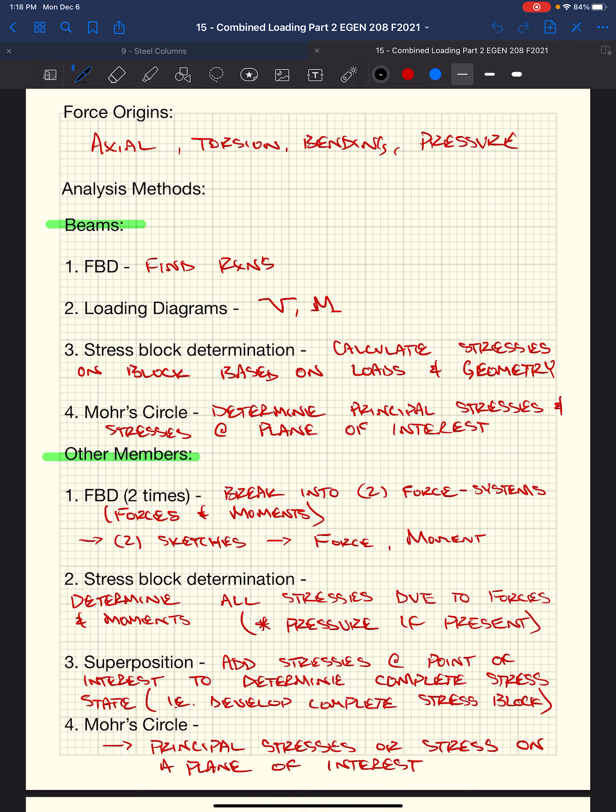Then we can calculate stresses on a stress block, based on those loads and the geometry of our beam. And then we can finally go to Mohr's circle, because we are always looking for the worst case stresses at a given location.

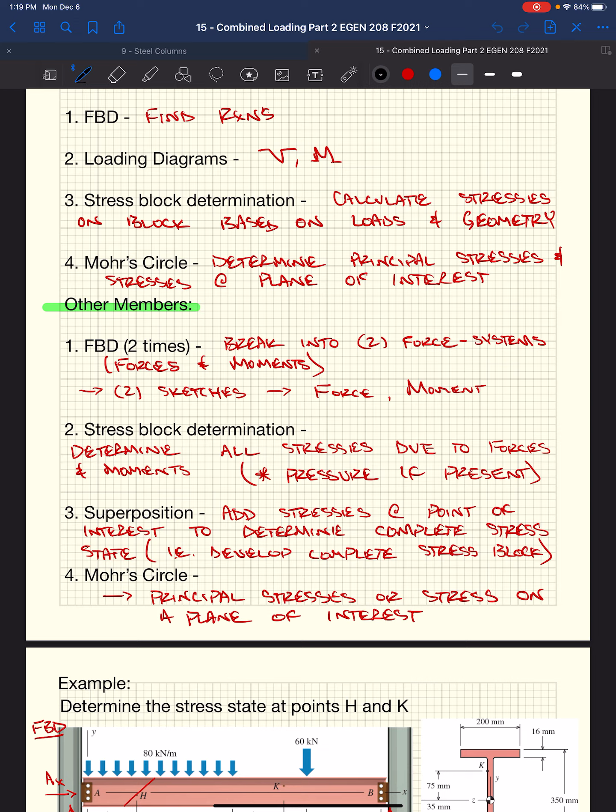And so we need to utilize Mohr's circle at times to make sure that we capture our principal stresses, which is our stresses in which we would have zero shear stress, our extremes. And then we can use that Mohr's circle to also figure out our extreme shear stresses, our max shear stresses. So that's our beams approach.

For other members, things can get fairly complicated fairly quickly. We can have bending in two directions, we can have axial load, we can have torque.

So when we have those things, when we approach other members, which we're going to start an example today, we're going to look at a free body diagram, but we're going to do that free body diagram twice. And what does that mean? We're going to break our force systems into two separate ones that incorporate our forces and our moments.

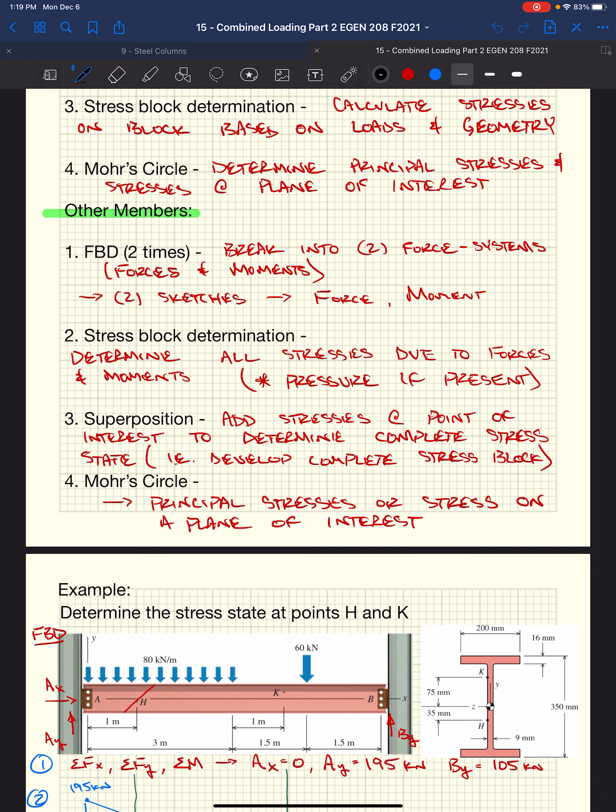We're going to have a shear force, we're going to have an axial force. And sometimes, based on the configuration, those shear forces and axial forces, say over here, in some bending problem or some mechanism, is going to create a bending moment or torque or something else happening where we're actually looking for in our mechanism. And so separating them can make things a bit simpler and isolate the forces and the moments.

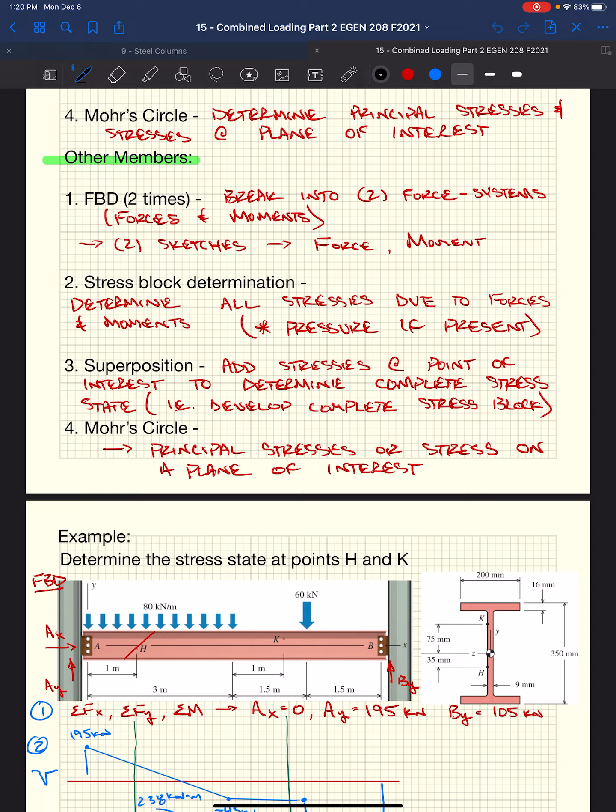So then after we do that, we can then figure out a stress block for each of those two force systems, determine all stresses due to forces and moments, pressure if it's present. And then once we have these two essentially stress blocks, we can add everything together using superposition, because we know those forces and moments are acting together. We just separate them to make things a little bit simpler.

And then again, once we have that final superimposed stress block, we can figure out Mohr's circle for that stress block and then figure out our maximum stresses, our normal stresses, which are our principal stresses, and our shear stresses, which are the top and bottom of our circle.

So when we started our example, we started our beam example on Friday, and they asked us to determine the stress states at point H and K. And as I mentioned on Friday, us as engineers, you as engineers, would be the ones deciding where we want to look at this beam, what points H and K are and where they are on our beam.

In this instance, they gave it to us. I will give it to you in the exam - that's not, I'm just saying in the future, as you do this more and more, you will find that you are the one that's going to decide where you look at this member. In this case, they gave us H and K.

As we know from our approach, we need to figure out our reactions and our shear and moment diagrams, so we did that. Now that we know our shear and moment diagrams, more importantly, we know our shear and moment as it relates to our 2 points of interest, H and K, because we know our demands at H and K.

We could draw a free body diagram, which helps us discern what we have and what we don't have for our positions at H and K. In this case, we have our design demands, moments and shears.

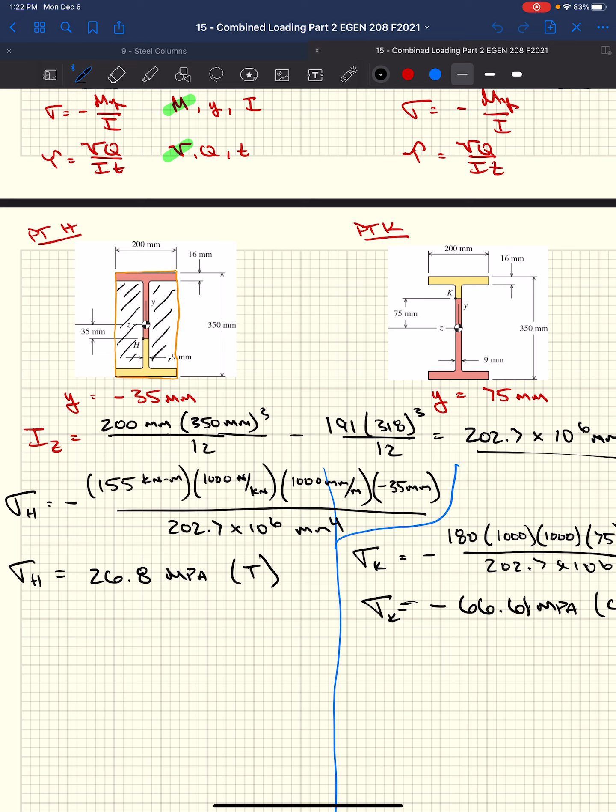We also know for negative My over I, we need the moment of inertia. So I decided, as I explained on Friday, I just did the overall rectangle minus two smaller rectangles. And you could go through the parallel axis theorem instead. Totally valid.

So I figured out the moment of inertia, and based on knowing the moment, the distance to our point from the neutral axis or centroid, and our moment of inertia, we could figure out our stresses. Our stress at H is 26.8 megapascals positive, so it's in tension. And our stress at point K is 66.61 megapascals in compression, because it's negative.

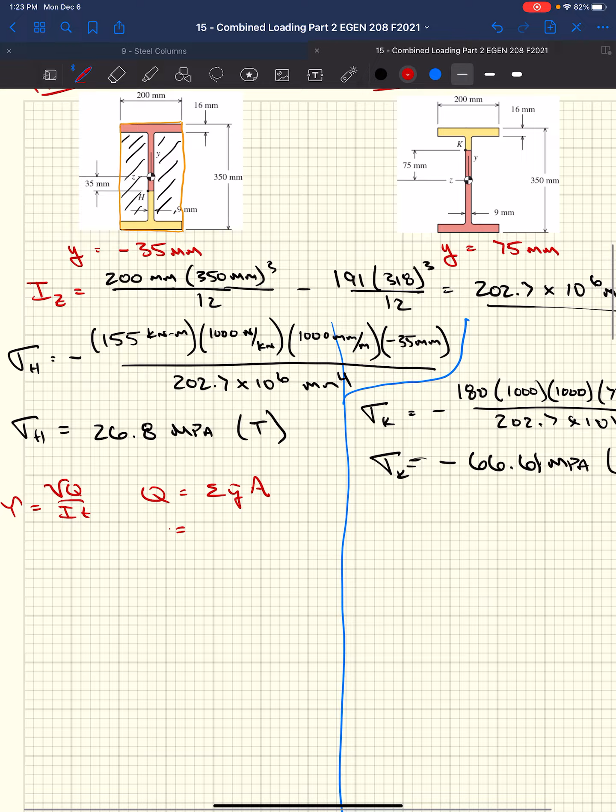Now we need to figure out our shear stress, tau, VQ over It. We know Q, the first moment of our area, or the integral of y dA, is essentially the summation of all of the parts of our shape above or away from our point of interest, of y bar A, the centroid of our piece times the area.

In our case, if we were looking at H, y bar A would be a summation. I'd probably look at three rectangles: what is the y bar or distance to the centroid of this rectangle times its area, plus the distance to the centroid of this rectangle times its area, plus this one as well. So if you do that, and you can do this any way you want.

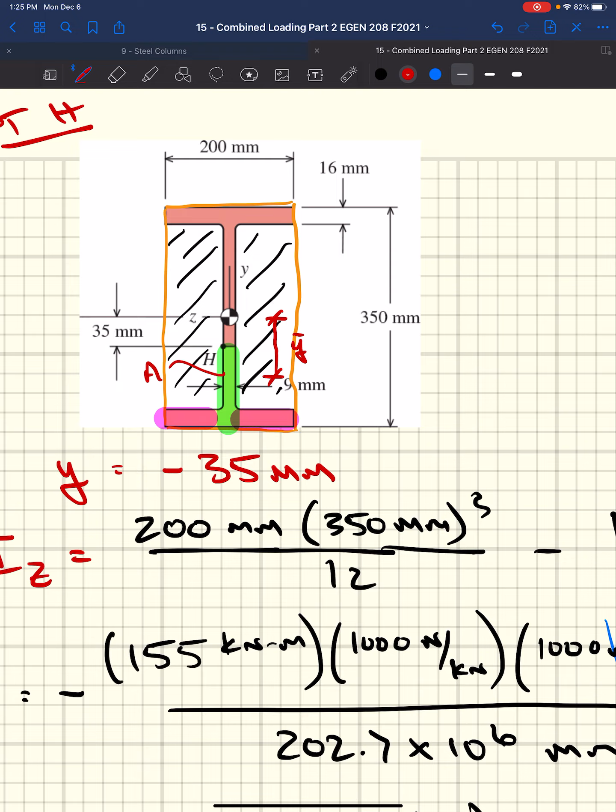You could separate this into many different rectangles. You could look at just the flange and then cut this off above the flange and just look at the web. You could cut the web into two rectangles and do it twice. It doesn't matter, you're always going to come up with the same answer, but we're looking for the distance to the centroid, or y bar.

All the way up to the centroid, y bar, times area. We do that for each of our rectangles, for the area that's beyond our point of interest. We cut it horizontally at our point of interest at H, as we did when we learned about shear stresses.

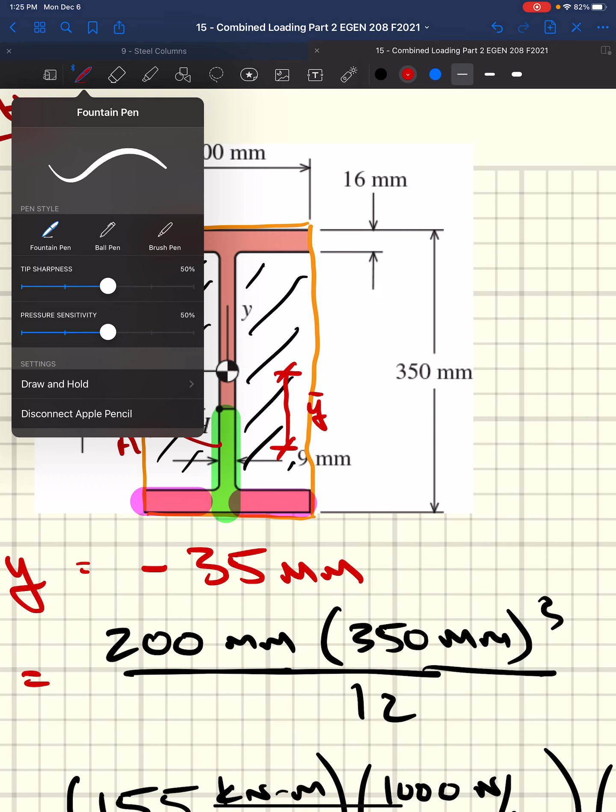So if we do that, I'm not going to bore you with all of the details. We get 642,652 millimeters cubed. Y is in millimeters, A is in millimeters squared, so we get millimeters cubed.

Based on that, we've got all the other parameters. V we know from our shear diagram. Q we just calculated. I we calculated to figure out our bending stress. And then T is the width of the cross section when we cut that horizontal plane.

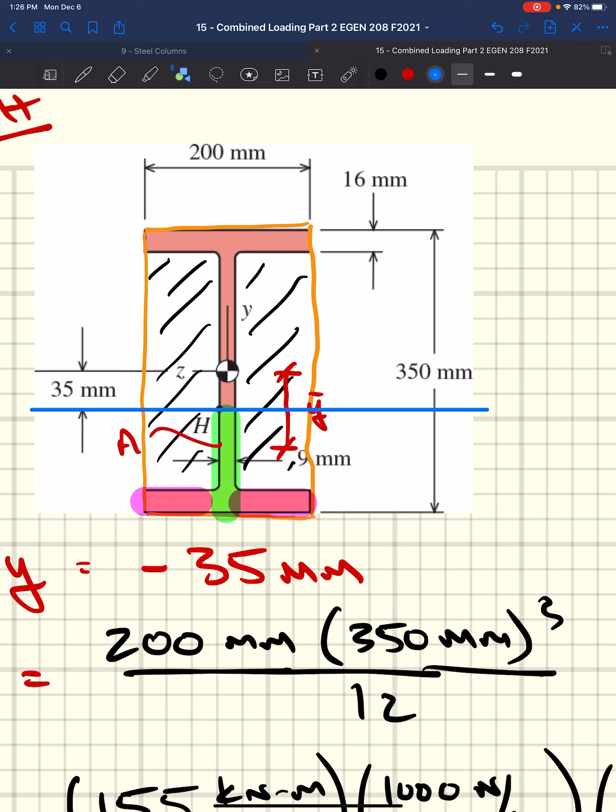So if we can imagine at H, we are going to essentially cut this member right at H. And we want to know how much of this member is along this cut plane—how long is this? Well, so that would be our thickness T. So T is 9 millimeters.

In the homeworks, I think you had two webs, so if we had another web coming down here or another web coming down here, it'd be 2 times 9 millimeters, because we're cutting 2 sections. In this case, we only have one, so our thickness is 9 millimeters.

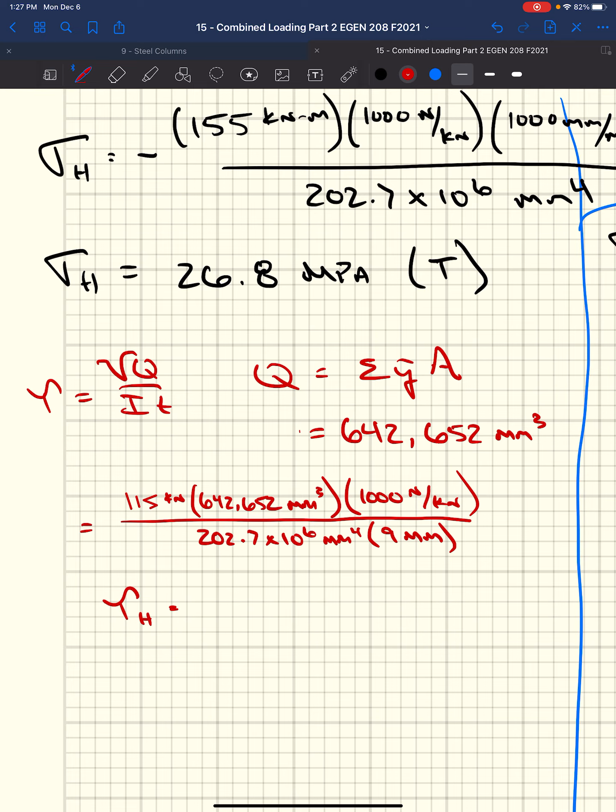Based on our shear diagram, the shear at point H we determined was 115 kilonewtons. We have 642,652 millimeters cubed, and I'm going to convert to newtons, because we know a megapascal is a newton per millimeter squared, divided by I, 202.7 times 10 to the 6th millimeters to the 4th. And as I said, our thickness, or the width of our cross section that gets cut by that horizontal plane, is 9 millimeters. So I put that in there, and we get tau at point H equal to 40.5 megapascals.

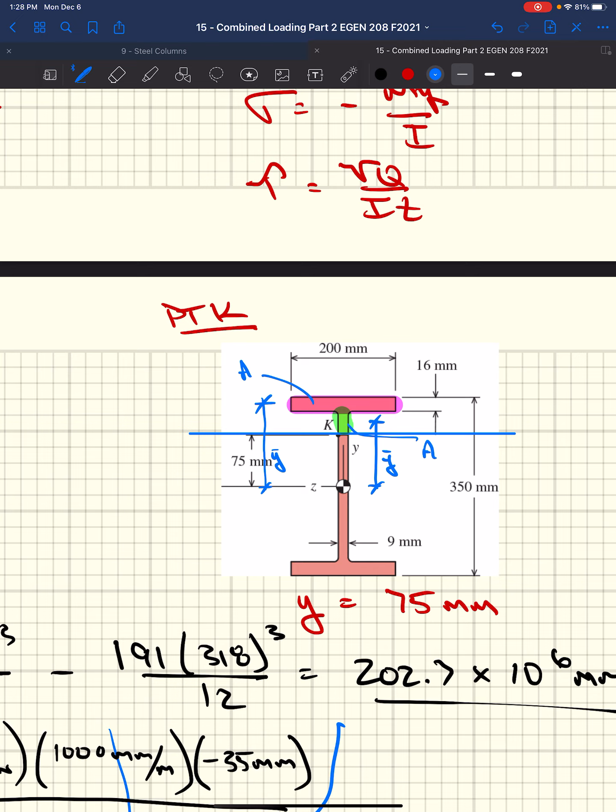Same exercise at point K. VQ over IT, Q now equals 622,852 millimeters to the third. What does that mean? Again, we cut our cross section at our point of interest and try to figure out the first moment of the area beyond our horizontal cut at that point. We could break this into one rectangle here and one there, take the Y bar and area for each, sum them up, and that gives us Q, which is 622,852 millimeters to the third.

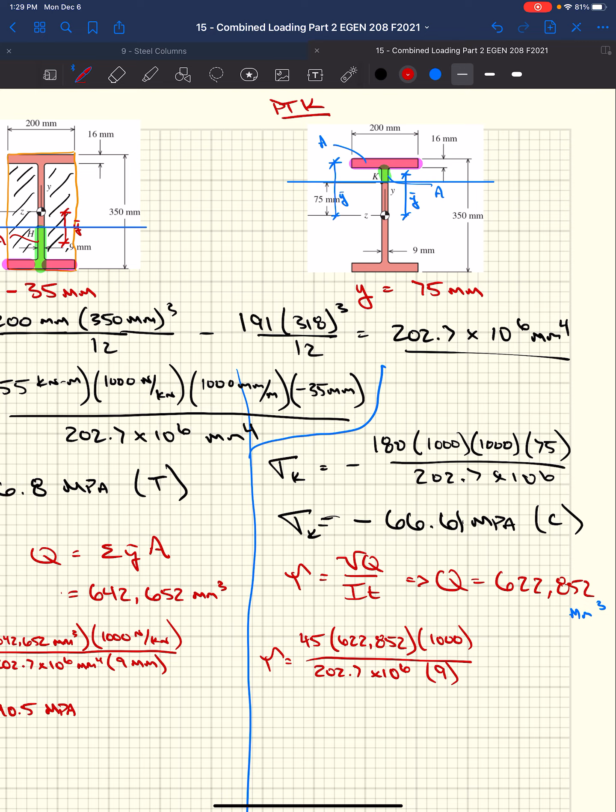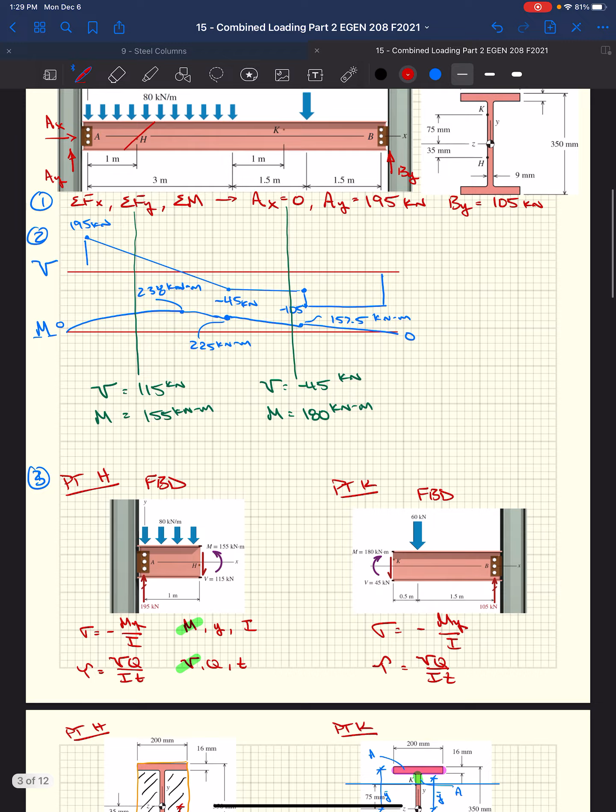If we run through the entire calculation, we have 45 kilonewtons, from our diagram above. Our Q we just calculated, converting to newtons. Again, 9 millimeters, since we're still cutting through the web. So now we get 15.4 megapascals.

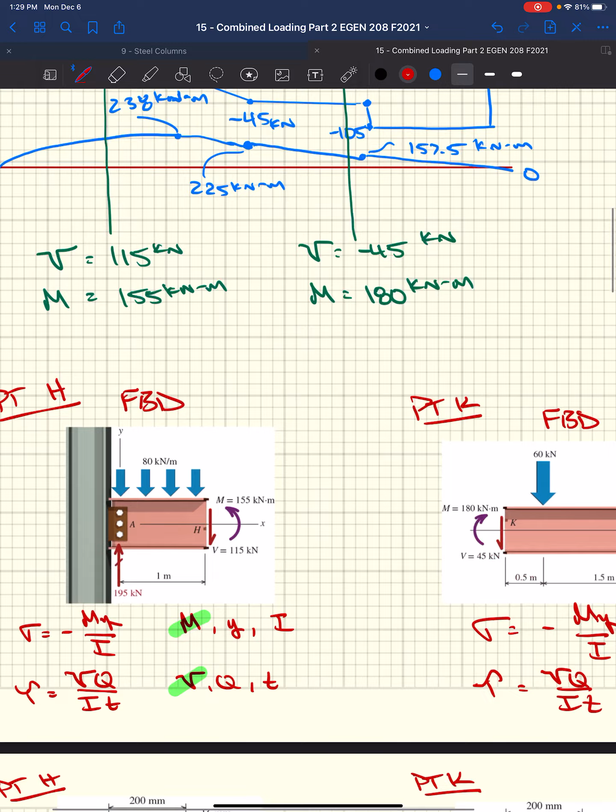Okay, last part of this, I believe they asked us to determine the stress state. So we're going to finalize our calculations by giving a depiction of the stress state at our two points. We're going to create our two little blocks, look at it, make a block at H and a block at K, and figure out what are the normal stresses and shear stresses.

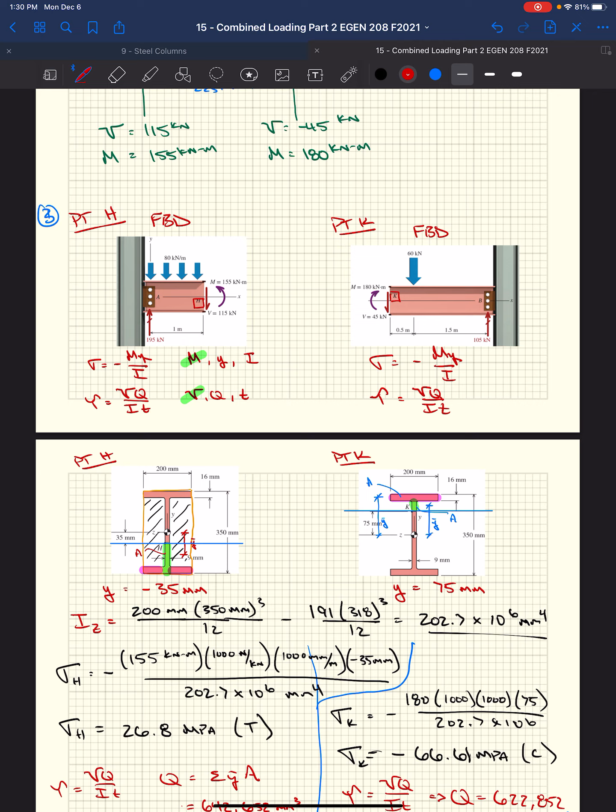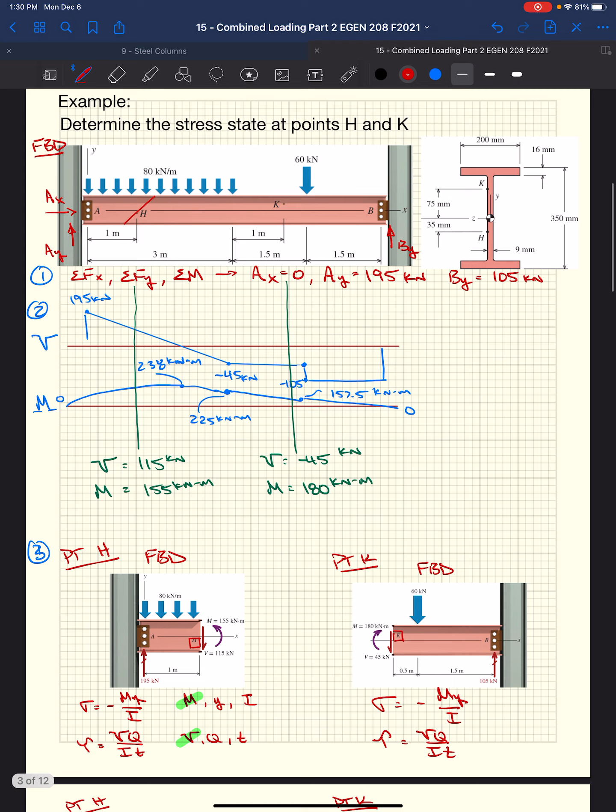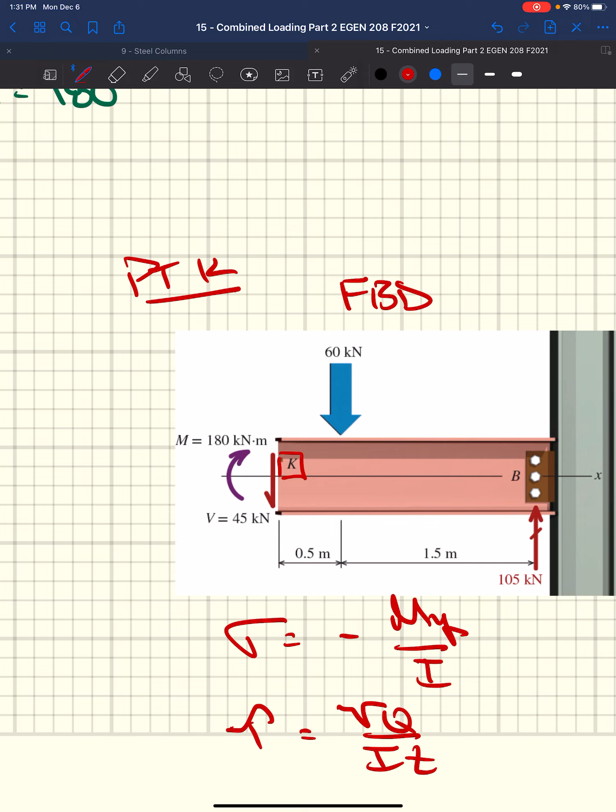Yeah, got a holler. What's up? So at point K on our shear and moment diagram, our V was negative 45 kilonewtons. Would that make our tau K negative then?

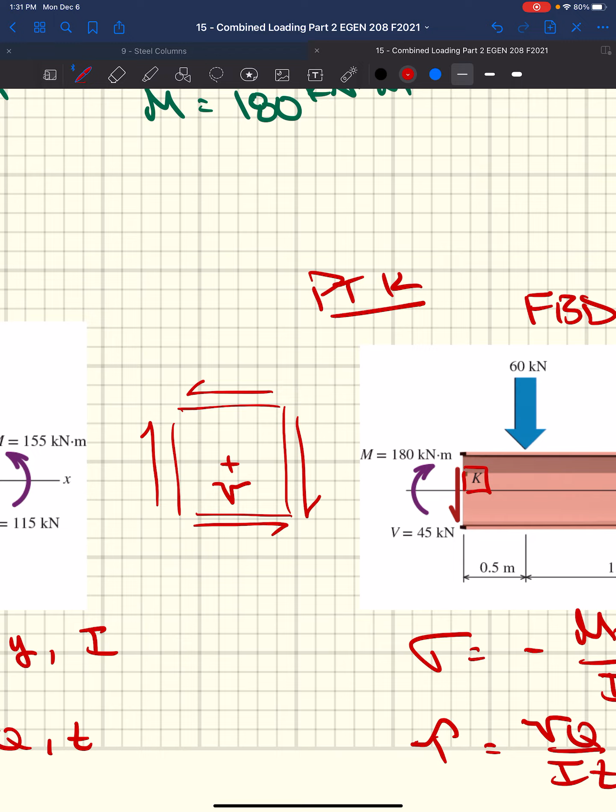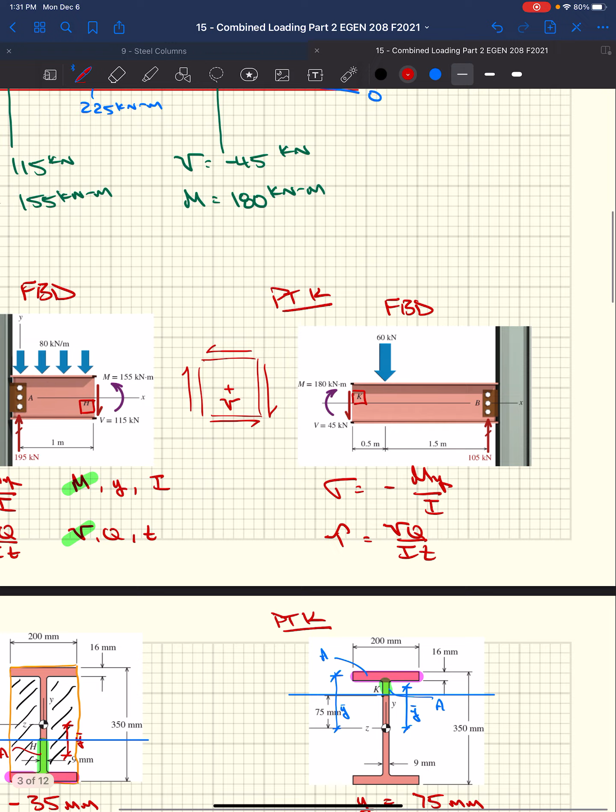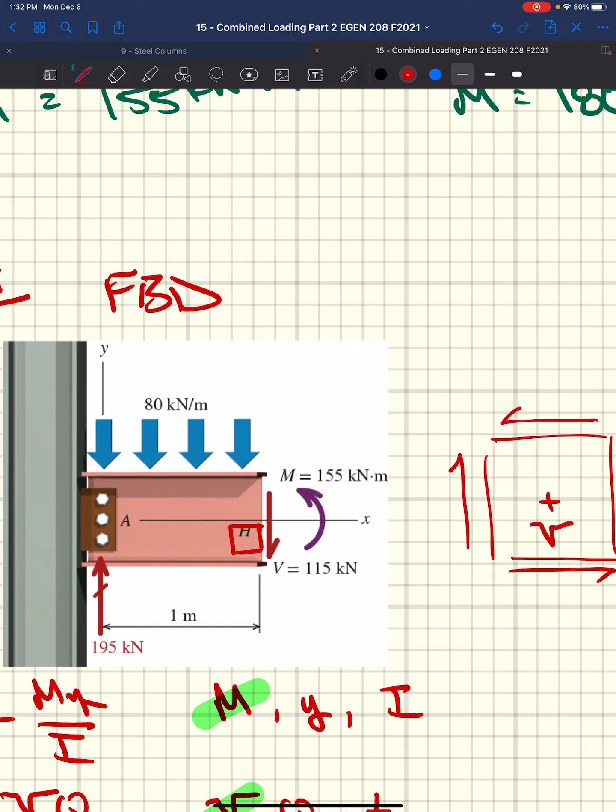No, what it does is it gives you a direction. So because our shear was negative 45, when we draw a free body diagram of K, it depicts that our shear is down. A positive shear, remember, is up on the left, down on the right. That's our sign convention for positive shear. So it depicts that our shear direction on this face is downward, and on this face here it's upward. This is point K.

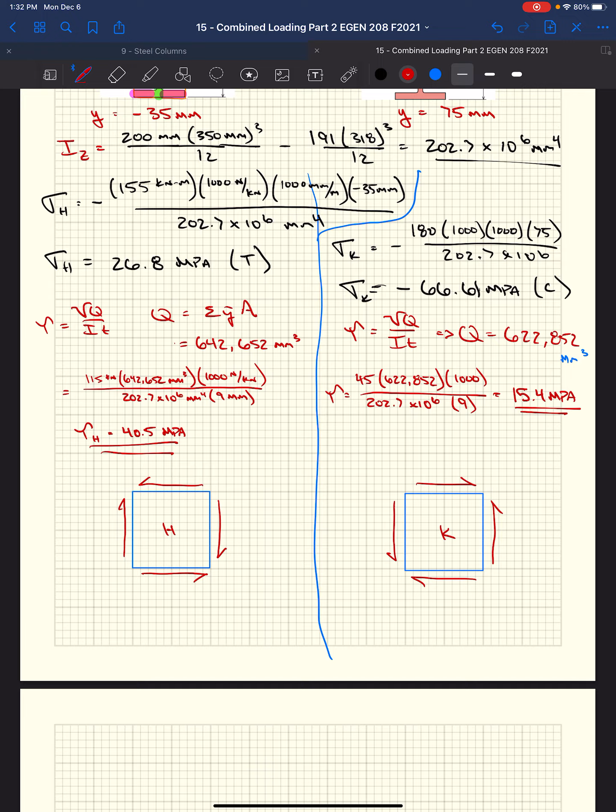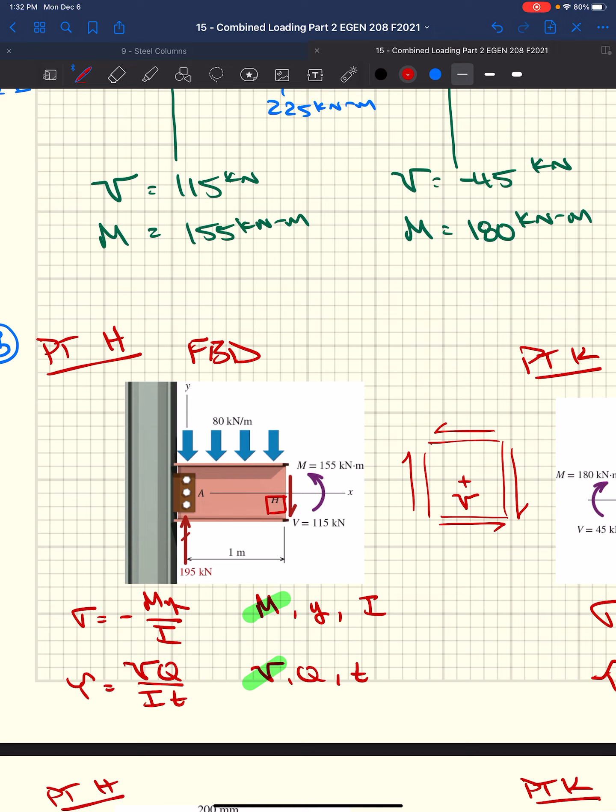On point H, if we go back up here, we had a positive shear at point H of 115 kilonewtons. That means our shear on that cross section is downward on the right hand side, which is positive: up on the left hand side, down on the right hand side. So our shear does something like this, and we all know it does something like this to maintain equilibrium, since we can't have this thing flying off into space.

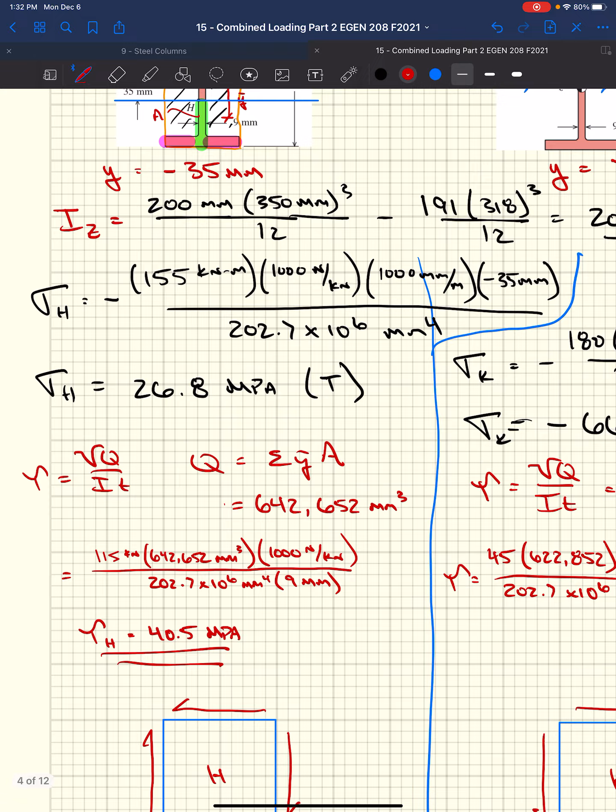We also know we don't have any overall axial forces in this beam, just bending forces, and we know those bending forces create bending stresses. If we drew a little square at point H, we have a tensile stress acting of 26.8 megapascals. So on our X face we've got this 26.8 megapascal stress acting. Our tau is 40.5 megapascals. We've got no stress on the top surface of this stress block, since there's nothing trying to squeeze this beam vertically. So that's our stress state at point H.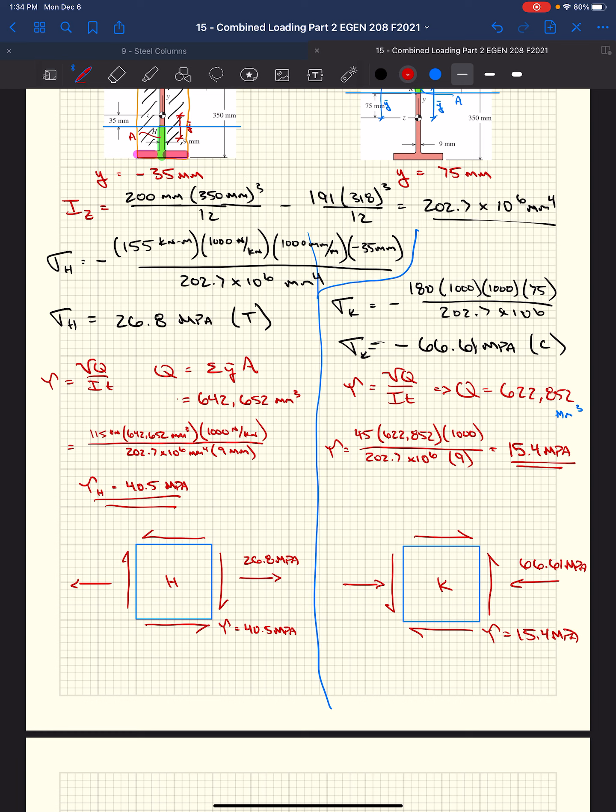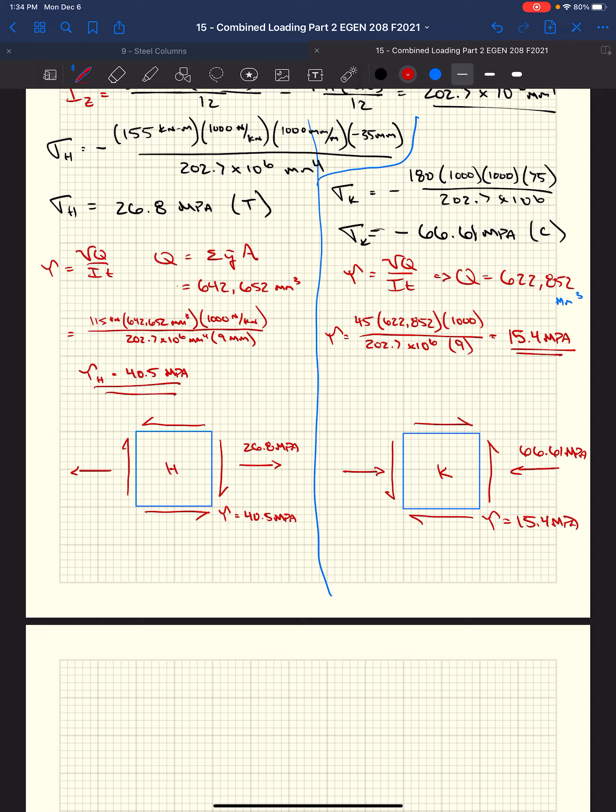At point K, again, as we mentioned, we figured out the direction of our tau based on the free body diagram. We know our shear stress tau is 15.4 megapascals, which we just calculated. We also know we have a compressive stress, since it's in the top of the beam under positive bending, so it's in compression. Our sign convention told us that. So we have 66.61 megapascals. Again, we have no forces in the vertical direction, so there's no stresses on the vertical faces or the top and bottom faces of our block. And that would be the stress state.

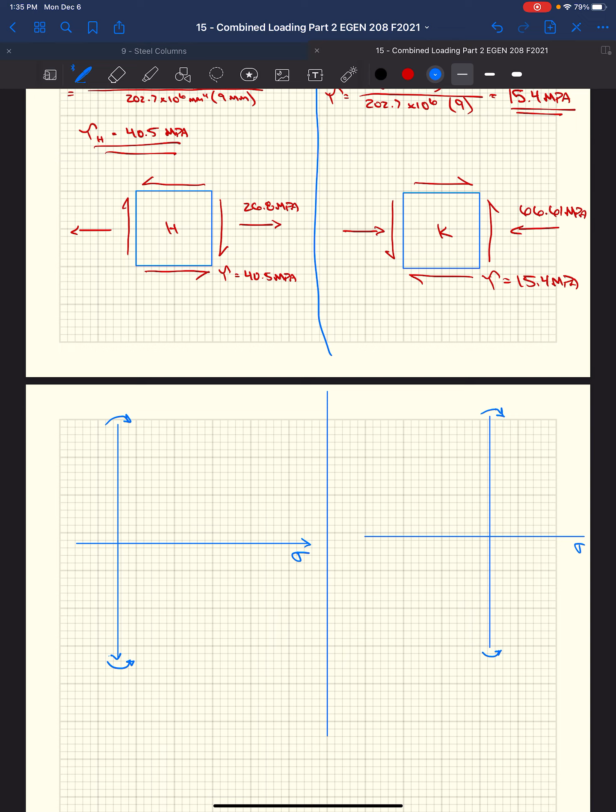This was a question on the exam. I could ask you from here what is the principal stresses at point H, or what is the maximum shear stress possible at point H or point K. In that case, we would continue by plotting our Mohr's circle for each of our stress states. So we've got our sigma and our tau.

We would plot our 2 points. So if we looked at point H, for instance, we have tension stress on the X face with a shear stress of 40.5 in the clockwise direction. Clockwise is above the x-axis, so we know we're somewhere in here plotting this point.

Say it's right there. This is our sigma x comma tau xy, right? That would be 26.8 comma 40.5. And then similarly on the y face, we need to plot another point, as we know from Mohr's circle.

In that case, we do not have a normal stress, so we're going to be on our y-axis. We know the shear stress is acting in the other direction, it's counterclockwise. For counterclockwise, we're down here below the x-axis. So we're going to be on the y-axis, down here an equal distance below the x-axis from our other point. This is sigma y comma tau yx, y face at x direction. We would then draw a circle.

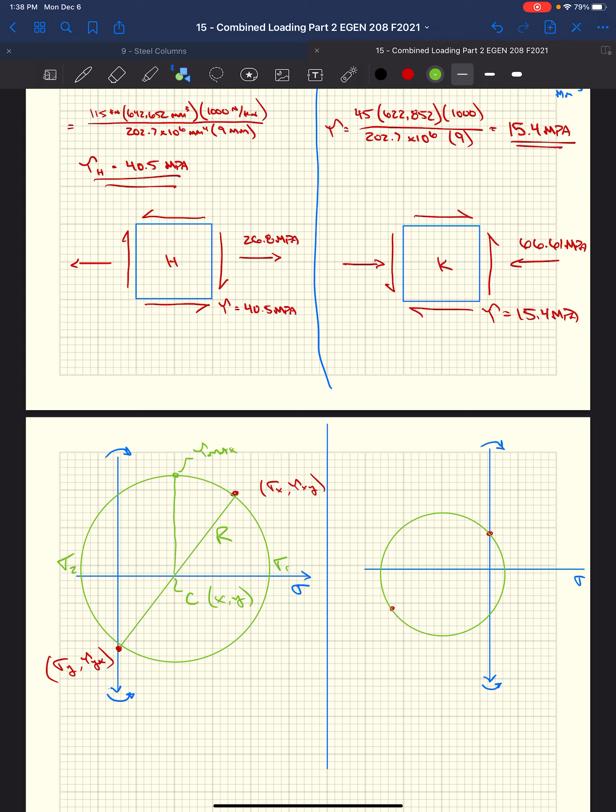Then I could take it a step further on the exam and say, if you had a material and the yield stress was 36 KSI and you wanted a factor of safety of 3 with respect to design, does this material work or not work at point H? So you'd say, okay, 36 KSI for yield, for normal stress you divide it by your factor of safety, you get an allowable stress, and you could relate that to what your maximum stress is, sigma 1 or sigma 2. You could say yes or no.

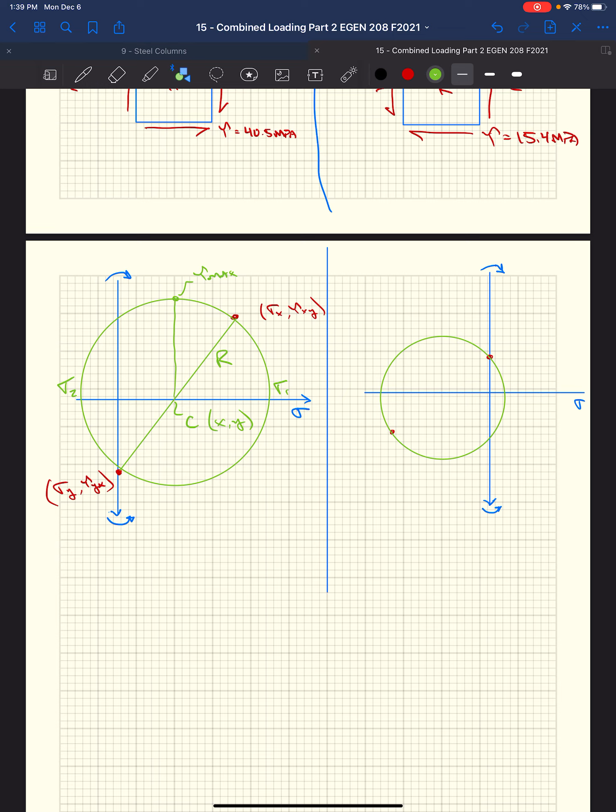I could also ask if there was a weld at an angle or some sort of connection, and ask what the stresses were at a 30-degree angle at point H. You could figure that out too, knowing that Mohr's circle is twice that of the real world, so you'd rotate whichever direction, 60 degrees, in order to figure out what the stress state was at 30 degrees.

Got a whole semester worth of stuff. Okay.

We've got one more example, well, two more examples. So that was our beam example, fairly straightforward. I think for the most part we've done most of that through some of the other homeworks and some of the other parts of the text.

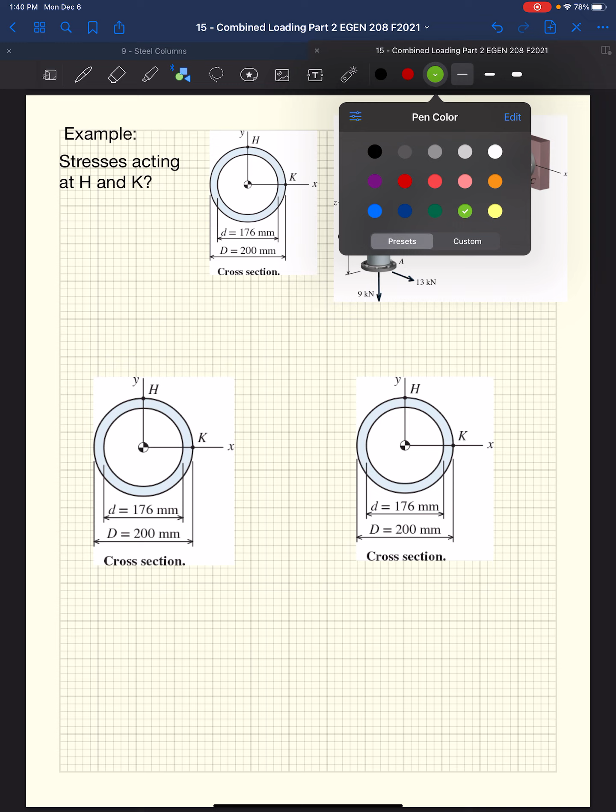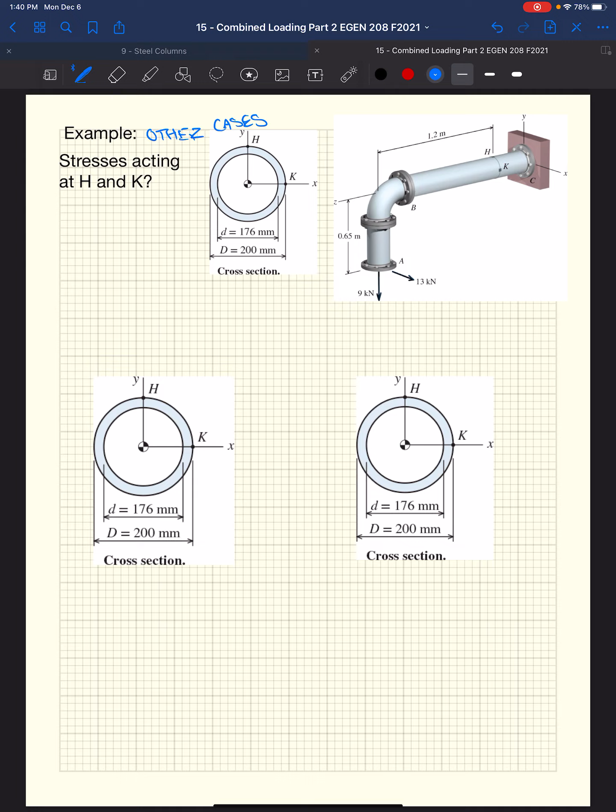Now when we're looking at other systems where we have force systems that are going to have not only forces, but create moments, this is where it's helpful to split the system up into two components: all of our forces that are acting at a point, and all of our moments that are acting at a point. So this is our example of other cases.

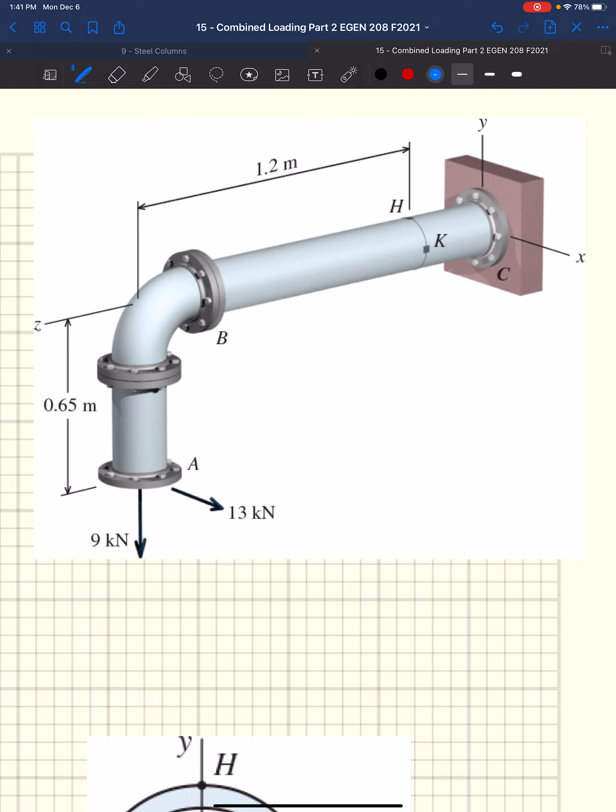So again, we're trying to figure out what are the stresses at point H and K of this pipe with an elbow, hinged fixed at a wall, and it has these two forces on it: a 9 kilonewton force acting downward, and a 13 kilonewton force acting off to the side, along the x-axis. We've got coordinates here of x, y, and z. So 9 kilonewtons is acting in the y direction, our 13 kilonewtons is acting in the x direction. Our H and K, they give us where H and K is in relationship to our two forces.

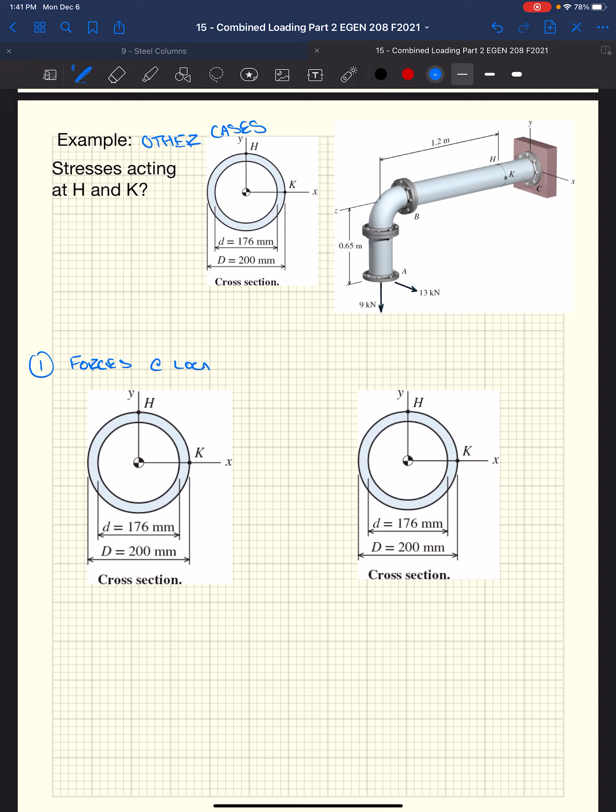You see that's going to help us. They give us where our forces are in relationship to the pipe, that's coming out of the wall, that's fixed from the wall. So as mentioned, when we start looking at other cases, it makes sense to separate our systems into two force systems: one is the forces at the location of interest, and the other one is what are the moments at our location of interest.

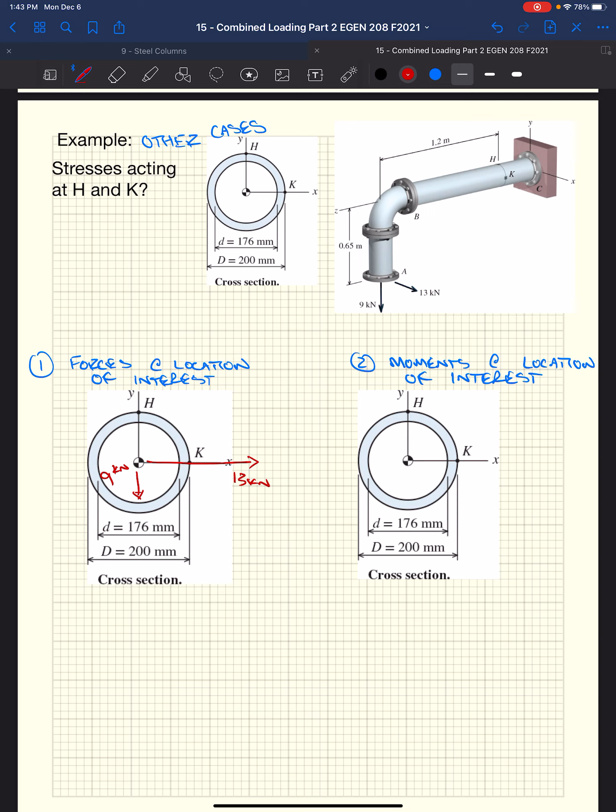We've got 13 kilonewtons acting in the X direction, still acting in the X direction at our points H and K. And then also we're going to have our 9 kilonewton force, acting downward. Well, if we were sitting there holding this pipe at the wall, we would still feel 9 kilonewtons downward. Someone puts 9 kilonewtons down there, I'm going to feel 9 kilonewtons right here. Statics, sum of the forces in the Y have to equal 0.

But when we jump to moments, our moments can be about X and Y, but also a moment about Z, which is the same thing as a torque. Torque, moment, couple, all the same thing. It's just a force of rotation about an axis. So if we take those two forces, as we know, when we move forces, those forces come with them not only the initial force, but the moment that's applied due to that force.

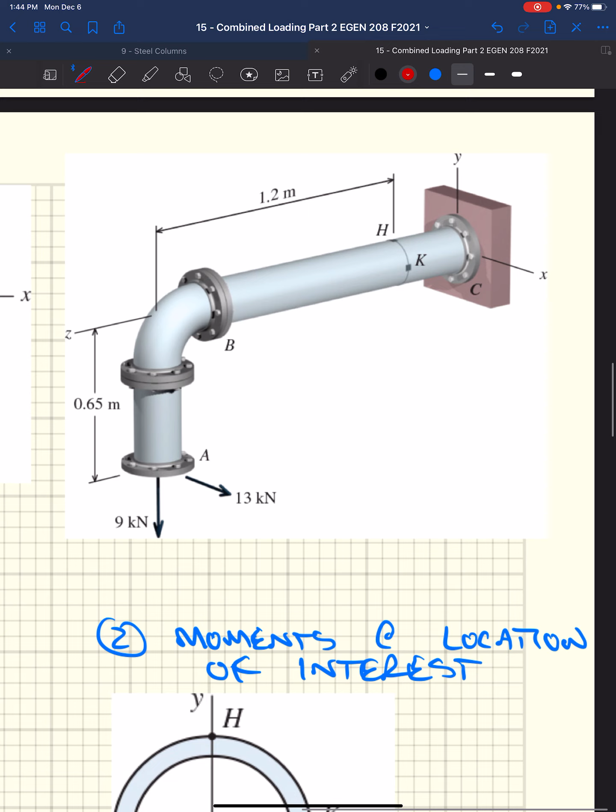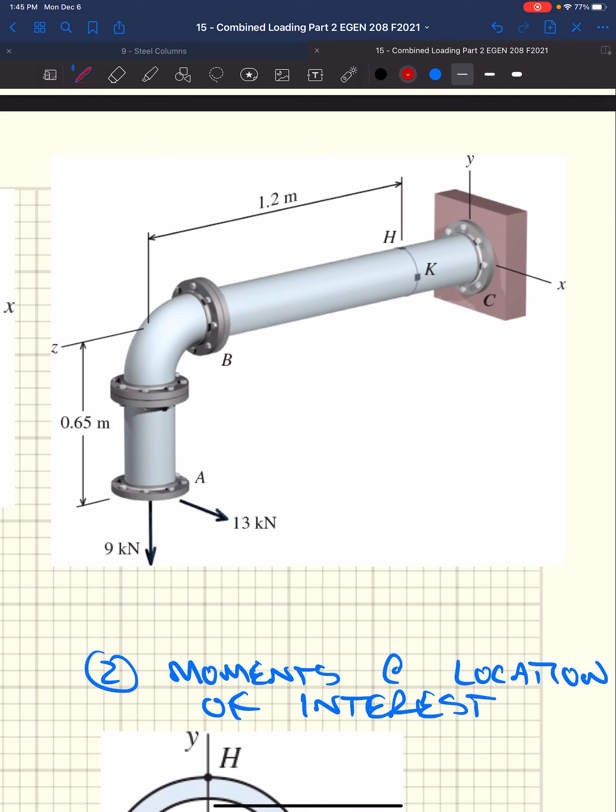So now if we're holding on to this pipe on the wall and someone pushes down at 9 kilonewtons, what's that going to do at H and K? You're going to have that force of 9 kilonewtons being transferred over the 1.2 meters. And what axis is that going to try and bend about? That's going to try to bend it about your X axis. So it should be going downwards in the Y.

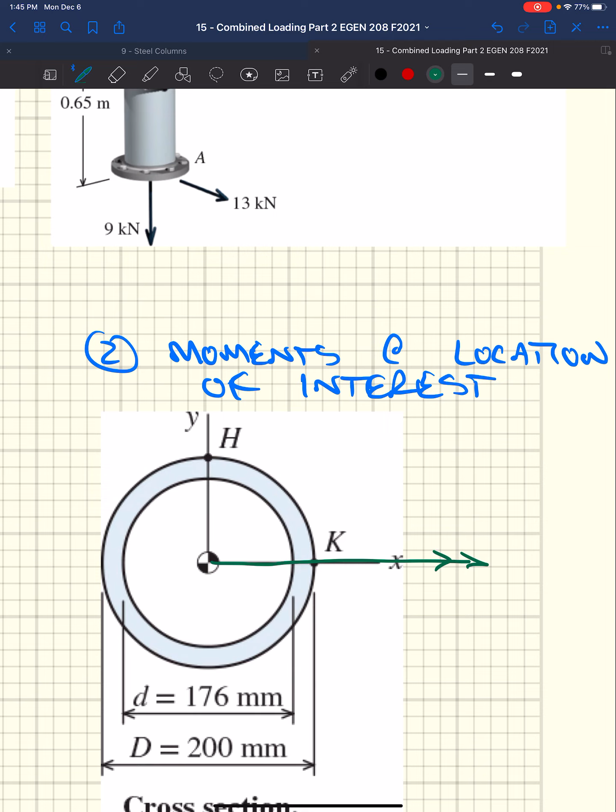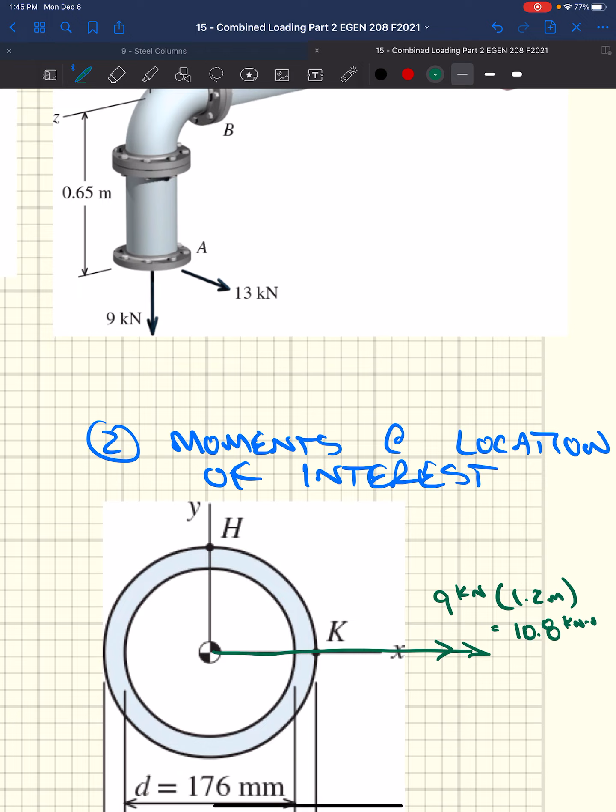So if we have 9 kilonewtons holding this pipe, someone pushes it down at 9 kilonewtons, we've got this x-axis sitting here. That 9 kilonewtons acting with a moment arm of 1.2 meters is going to want to bend about the x-axis. So if we look at our cross section here, that 9 kilonewtons is going to create a double vector arrow, which signifies a moment about the x-axis.

9 kilonewtons, we're rotating about the x-axis here. 9 kilonewtons times 1.2 meters. We got 9 kilonewtons times 1.2 meters, that's 10.8 kilonewton meters.

So now we have the 13 kilonewtons. Well, I guess first off, is there any other axis with which the 9 kilonewtons is going to force a rotation about? Yeah, I have a question. Why is the 9 kilonewtons in the direction of the X? Because if you look at the right-hand rule, you've got your moment arm and you've got your force. If you curl your fingers in the direction of the force, your thumb's kicking off along the x-axis.

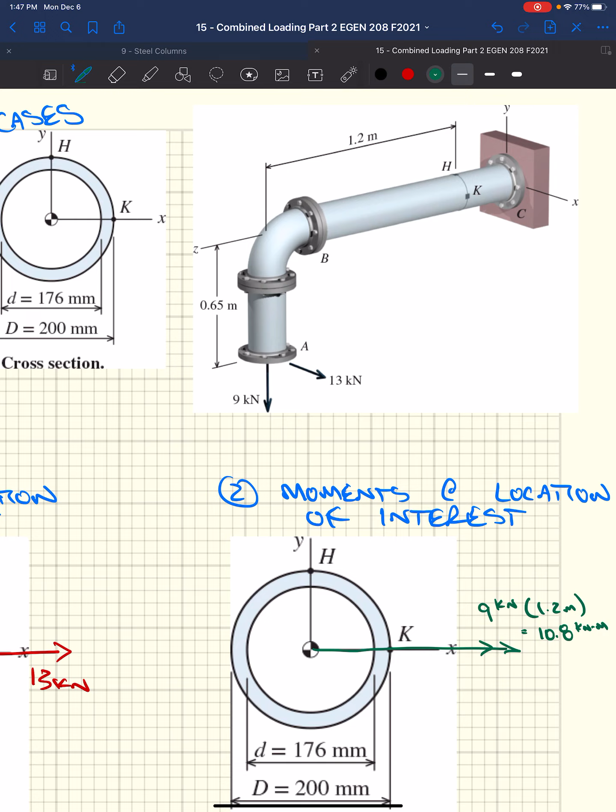Is there any other axis that the 9 kilonewtons is going to rotate about? No. So now we have our 13 kilonewtons. Again, if we look at the right-hand rule, we are at 13 kilonewtons. If we curl in the direction of the force, this is going to be creating a moment about the y-axis. But also, isn't it going to be creating a torque, a moment about the z-axis also? So it's not only trying to bend the pipe, but it's trying to twist the pipe also. Everyone see that? So if we're trying to bend the pipe, we're bending about the y-axis now, with 13 kilonewtons. Well, it has the same moment arm as our 9 kilonewtons at the 1.2 meters.

Double vector arrow, we've got 13 kilonewtons, moment arm 1.2 meters. We get 15.6 kilonewton meters.

Acting upward, right? Right hand rule, 13 kilonewtons. It's going to be acting up, my thumb's up. That's in the direction of the y-axis.

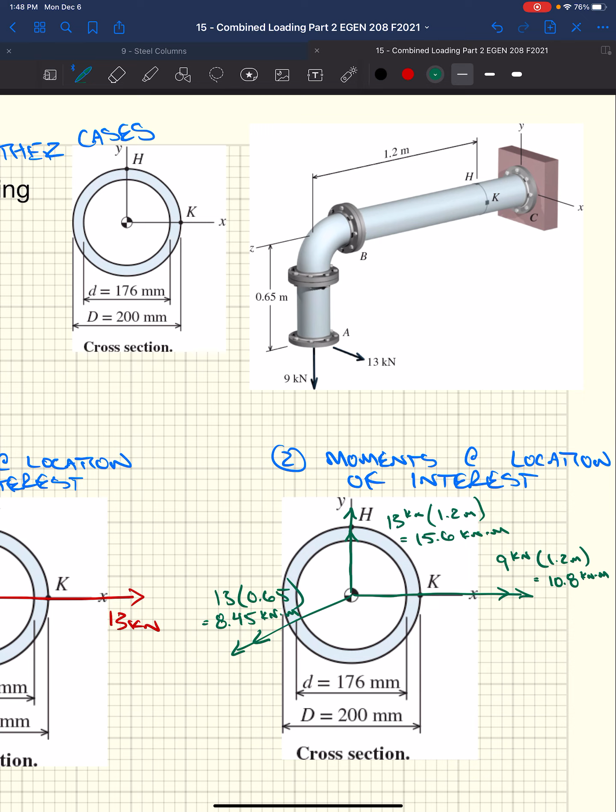Would it be the 0.65 for that arm for 13 kilonewtons? In the z-axis, yes, which is in and out of the page. That's this one, right? Because if I curled my fingers in the direction that this is rotating about the z-axis, my thumb's pointing outward, so it's going to be positive about the z-axis.

So we got 0.65 times 13 kilonewtons. That's this one out here, 13 times 0.65. We get 8.45 kilonewton meters.

So this is why the method for other systems can get pretty complicated pretty fast. We're moving this force all around a system and looking at a specific point that might be quite a ways away from our applied forces. But you need to transfer those applied forces and figure out what the applied forces are at the location of interest.

So to simplify things, we just try and break it up. We look at what forces are applied at that location. We're still going to have our 9 kilonewtons. I still got to hold up my pipe with 9 kilonewtons. And if someone's pushing it off to the side, I'm still going to have to resist that with the same amount of force.

And so we have our forces, and then we also have our moments. Because moving these forces along this system to the fixed point, the resulting location, we're going to have resulting moments. It's going to be twisting it about the longitudinal axis, going to torque the pipe that's holding in my hand. It's going to want to twist. It's also going to want to be bending in 2 directions based on the applied load. Everyone see that?

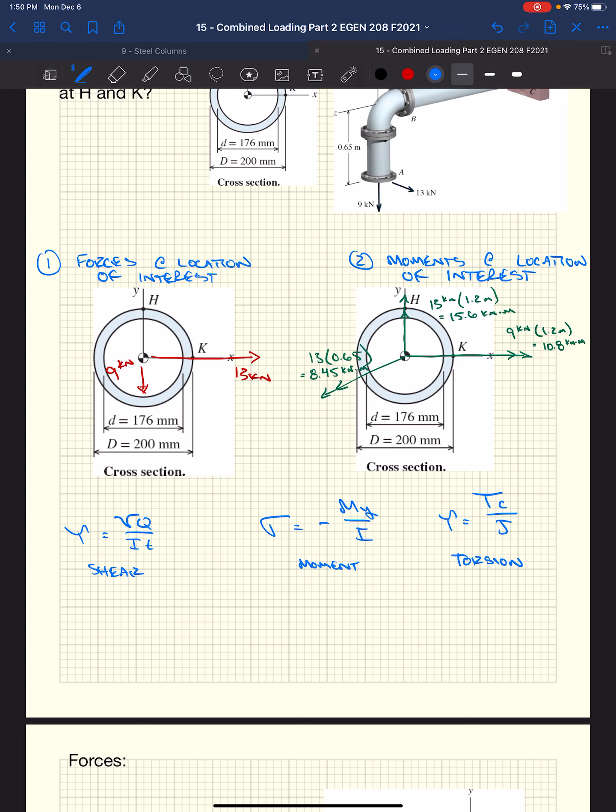And then we're finally, in this case, we're going to have one more. Got to dig deep for this one, it's been a while. Right? Torsion, TC over J, the torque times the distance from the center divided by your polar moment of inertia, is J.

Which is where the notes that are out on D2L would be worth printing off, because out there in properties of geometric shapes, we get equations for what J is. It's also in the notes. You put that on your note sheet.

If this pipe, for instance, if this was a pipe that happened to move pressurized steam, for the heating plant, we might have, could have pressure too.

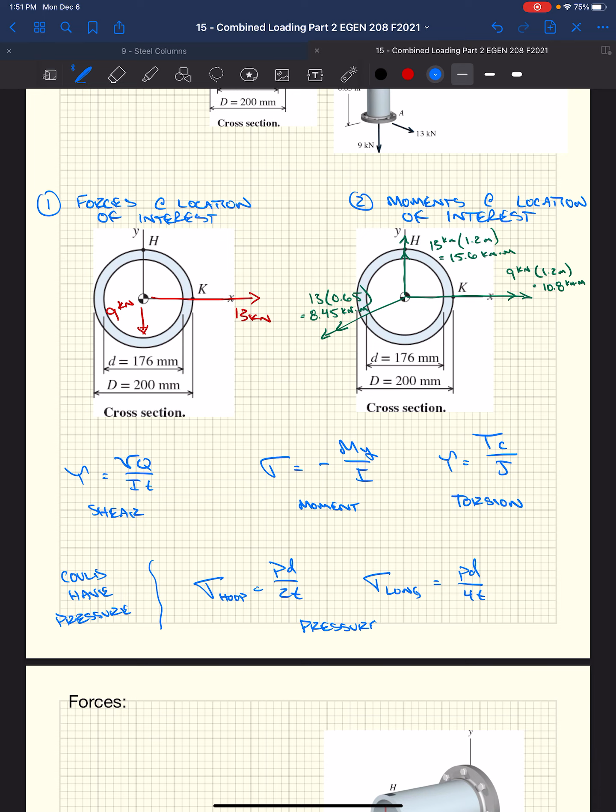Where, based on our derivations last week, we know that our stresses can come in the form of hoop stresses or longitudinal stresses.

So in case we didn't, we could have both these forces applied, and we could also say that inside the pipe, the pressure is 35 psi. And if you knew the pressure was 35 psi, we know that we have hoop stresses, trying to burst the pipe. And then we also have longitudinal stresses, also trying to burst the pipe. And we know hoop stresses are twice that of longitudinal stresses.

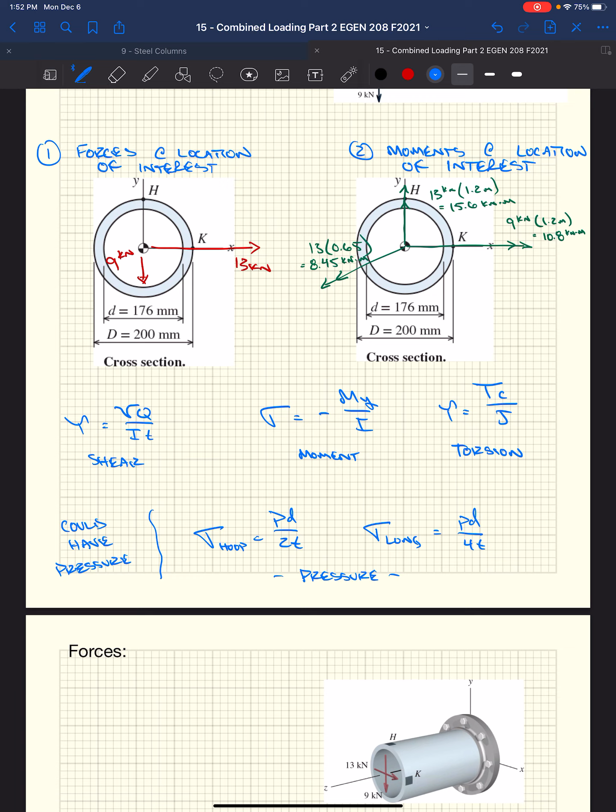That's why whenever you freeze a garden hose or fixed piping like copper pipe or steel pipe, that crack that usually forms is usually along the length of the pipe. That's because your hoop stresses are the greatest when it comes to pressure, so it's always going to be bursting in that direction, or twice as much.

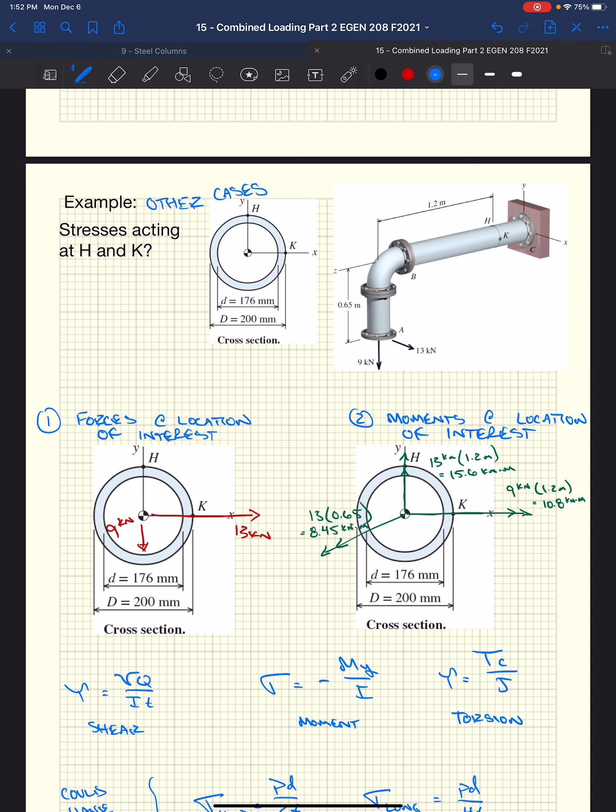So now that we've broken down our system into two force systems, we have our shear forces, or just our forces on our system. They could be axial forces. We could have a force acting in the z direction, if we had a force acting in the z direction, but we only had forces acting in the y and the x. But we could have had a force acting in the z. So we have our force system and then we have our moment system.

So we want to now look at each of our systems independently. Ultimately, we're trying to figure out what our stress states are at h and k based on these applied forces, so we can figure out a stress state. We're going to do that for both the forces and the moments, and then we can come back and add them together, using superposition.

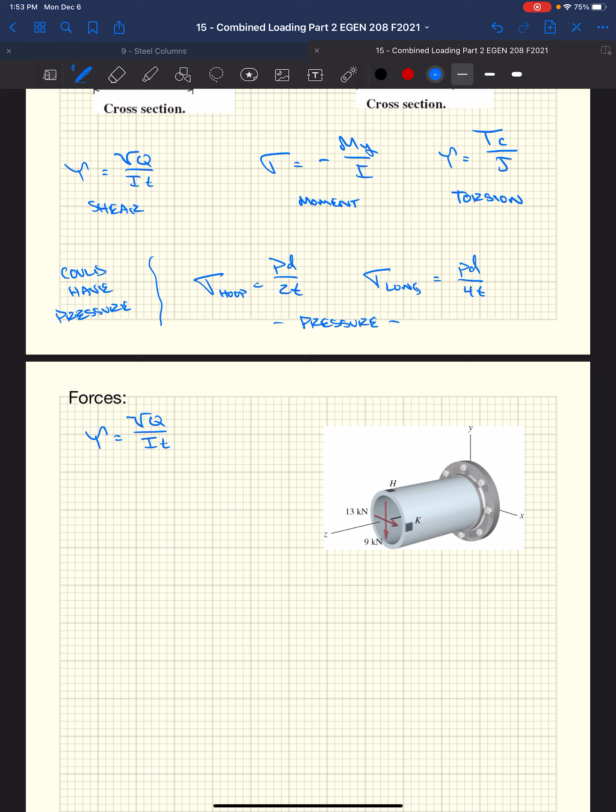So if we look at these forces, these are all shear forces, forces acting perpendicular to the longitudinal axis, remember? So we have 9 kilonewtons and 13 kilonewtons. So if we have shear forces, we have shear stresses. VQ over IT is our governing equation, as we know.

Out of this equation, we know now what shear is, but we need Q, I, and T. Let's look at the moment of inertia of a pipe.

They gave us our inner diameter and our outer diameter. From the notes, also out there in that note sheet that I would recommend printing off, we get this equation that relates the moment of inertia of a pipe with respect to diameters: pi over 64, outside diameter to the fourth minus the inside diameter to the fourth.

We get 31,439,850, which is probably more accurate than required. This is Appendix A stuff here. Q... 31,439,850 millimeters to the fourth. As I mentioned, that comes out of the equations in Appendix A, which are out on D2L.

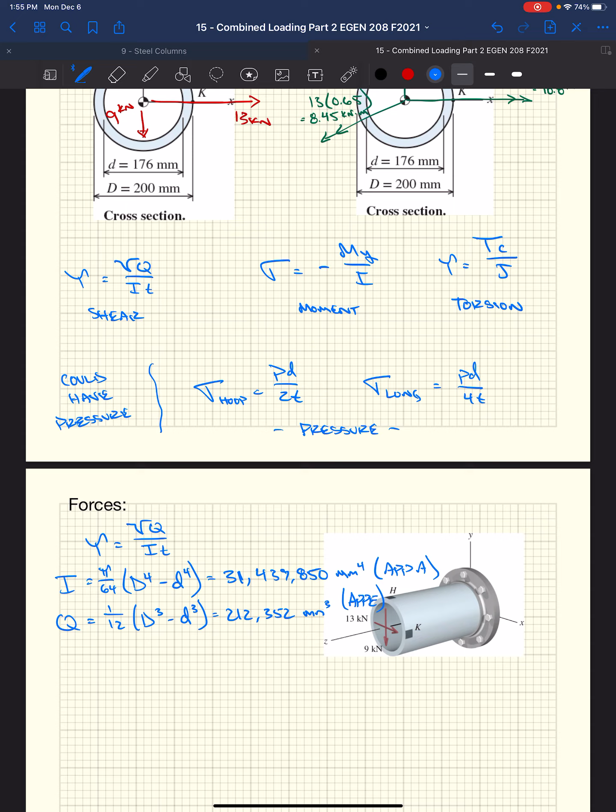You're welcome to print those off and bring those to the exam. Q, first moment of the area: that's 1/12, d cubed minus d cubed, big D minus little d. That's 212,352 millimeters to the third. That all comes from Appendix E.

H and K. We know shear stress is maximum at the center. As we get out to the outer edges, it becomes 0 in the direction of the applied force. So at point H, our 9 kilonewton force applied provides 0 shear stress. Does that all make sense? Because if you looked at a cross section, we're looking at point H. Q is 0 at point H, if we were looking at our applied shear in that direction.

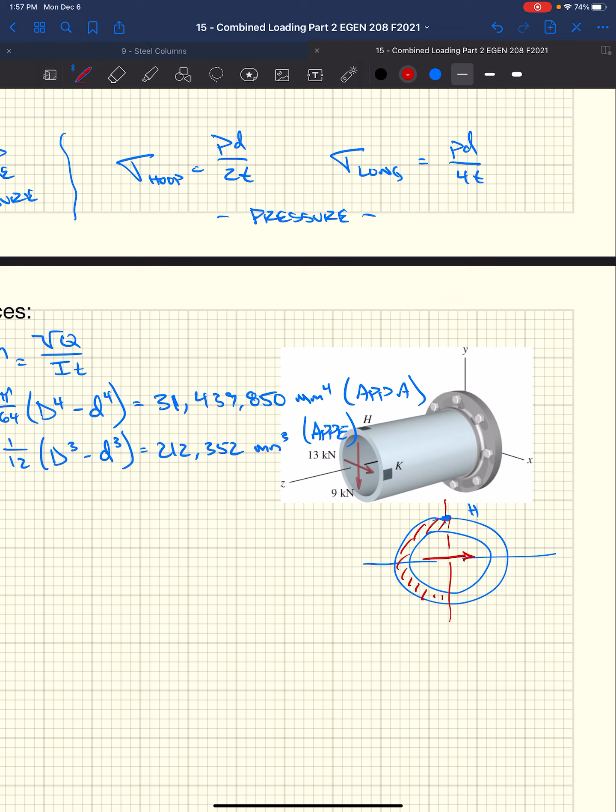Q being Y bar times A. Well, if there's no area beyond our point of interest, then our Q is 0, our shear stress is 0. But if we looked at a force going the other direction, our 13 kips, or kilonewtons in this case, our H is going to be on the half depth. We're now going to be looking at Q for this entire section here. Well, now this section has a centroid and an area, so it's got a Y bar and an A. So now we have a Q value, so now we have shear stress.

Based on that, let's look at point H, tau in the X direction. 13 kilonewtons is acting in the X direction, as I just discussed. We're going to have shear stress based on a force acting in the X direction because we're going to have a Q with point H. Well, if we know our V, which is 13 kilonewtons, and Q, well, we know 212,352 millimeters to the third.

I'm going to convert to newtons again because I want megapascals when we come out of this, or newtons per millimeter squared. We have our I, 31,439,850 millimeters to the fourth. Our T... is it 439 or 437? Because you said 37... oh, this is 9, no. 31,439,850 millimeters to the fourth.

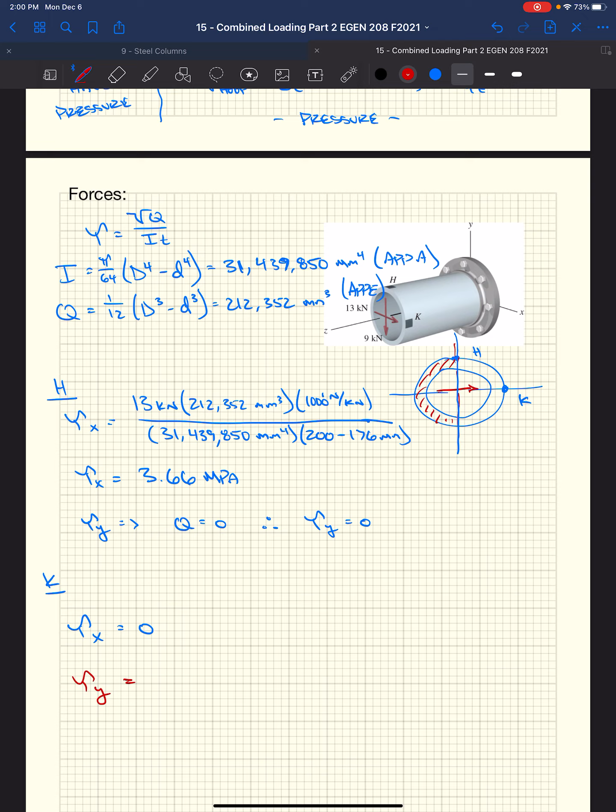And if we go through K, tau Y, well, we'll just go tau X. We know tau X is 0 at point K. This is point K over here. Because when we have a force in the X direction, like we show here, our Q is 0. Q is 0, then our shear stress is 0.

And we will finish tau Y on Wednesday and finish this example.